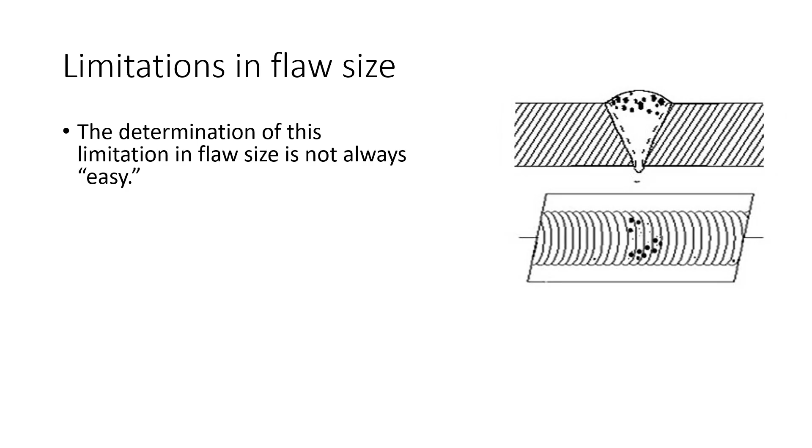What's the limitation in the flaw size that they can find? Determination of the limitation of the flaw size isn't always an easy thing to get figured out. This is something that's got to be figured out and determined, and there's got to be some thought put into it. Once again, this isn't an easy thing to figure out.

One common limitation specified in the use of NDT is no flaws are allowed. And this is just completely insane, because within any material there is going to be a flaw or some kind of discontinuity. It's just getting to the point to where we, as engineers and material science people and inspection technical individuals, can understand what those limitations are. And we need to realize what we can live with and what we can't.

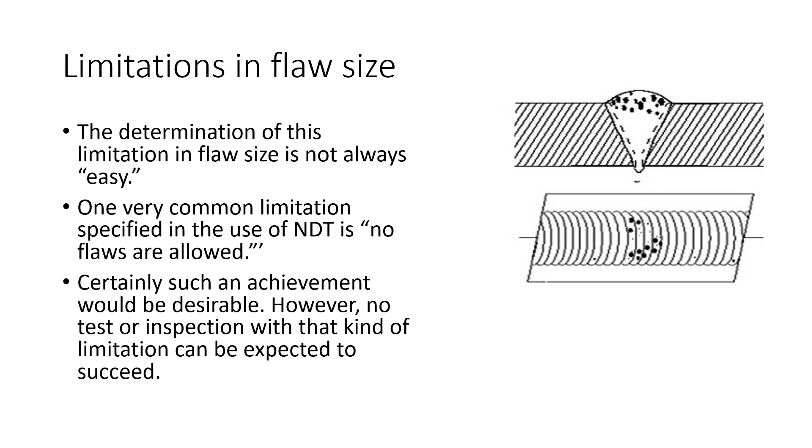So even though we'd like to have no flaws, nothing's perfect in this world. And we need to understand what is the limitations of these processes that we can live with. So no inspection or test method is going to be able to find every last flaw in a piece of material. So with limitations in flaw size, we've got to realize that it's impossible.

There's some things that are impossibilities, like find all flaws or find the smallest flaw possible. Well, what does that mean? And then once we figure that out, we're going to figure out, oh man, this is going to be super expensive. Non-destructive testing is very expensive.

You can make or break a job depending on how much NDE you're going to have to do. So even though we'd like to be able to find the smallest flaw possible, is it really important for everything that we're going to construct or build to just have everything absolutely perfect? Or can we live with certain flaws that are going to be inherent in that structure?

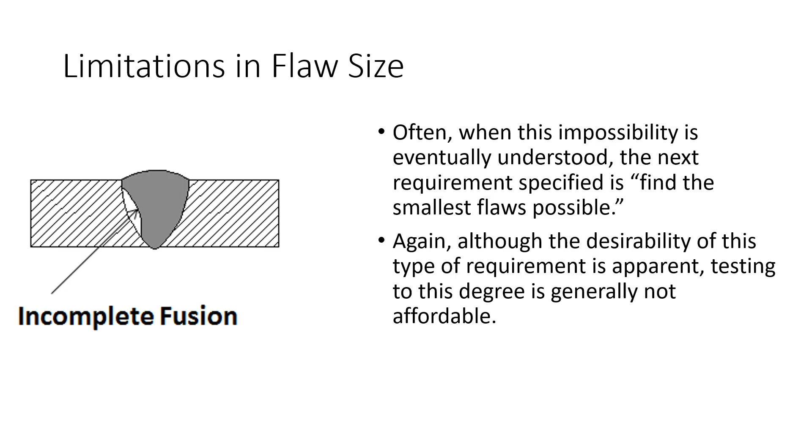So zero defects is usually not super realistic, unless you've just got ungodly sums of money and are in some kind of NASA situation. Because most manufactured materials that we're going to come across are going to have some kind of small imperfections. It's just the way the world works.

And when it boils down to it, a lot of these discontinuities aren't really going to affect our performance once we get something into service. And then, if we're going to go out there and look for really small flaws, the inspection cost is going to go up, because we're looking for needles in a haystack.

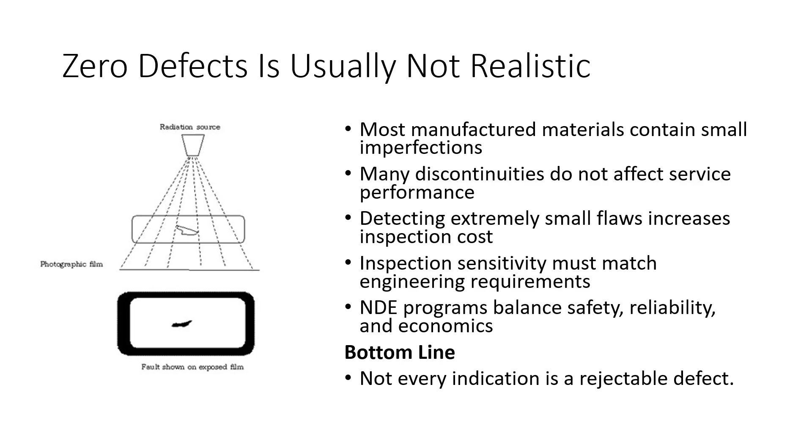So the bottom line is, not every indication that we run across is a rejectable defect. It's a flaw, it's an imperfection, but it's not a rejectable defect. It's not going to do anything in regards to affecting that component to do its job.

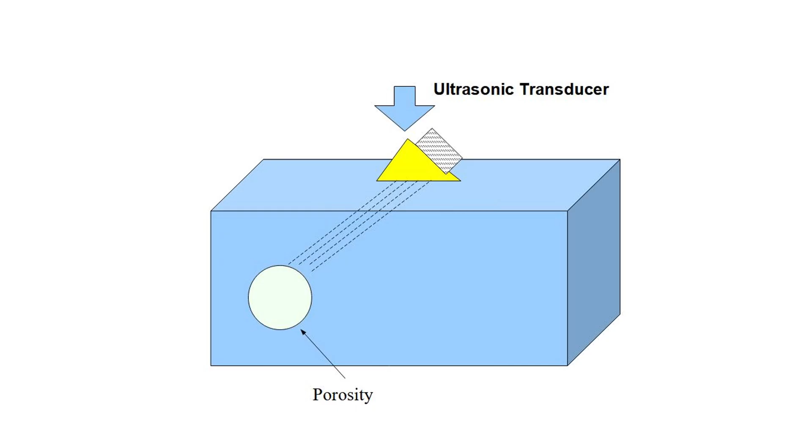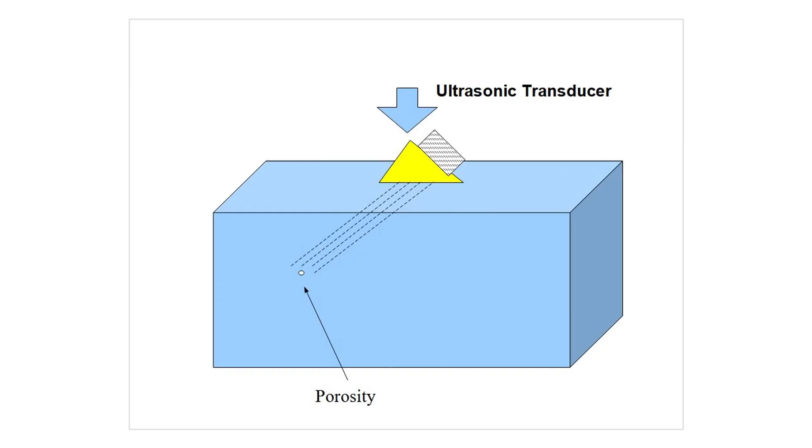Well, does that even count? That's what the non-destructive testing engineers and the structural and design engineers are for. That's their job, to tell us if we can live with this, or maybe we can't even find it. Maybe after a certain size, going smaller and smaller, it might be there, but we might not even be able to find it. So these are some of the things we need to keep in mind when we're talking about critical flaw size.

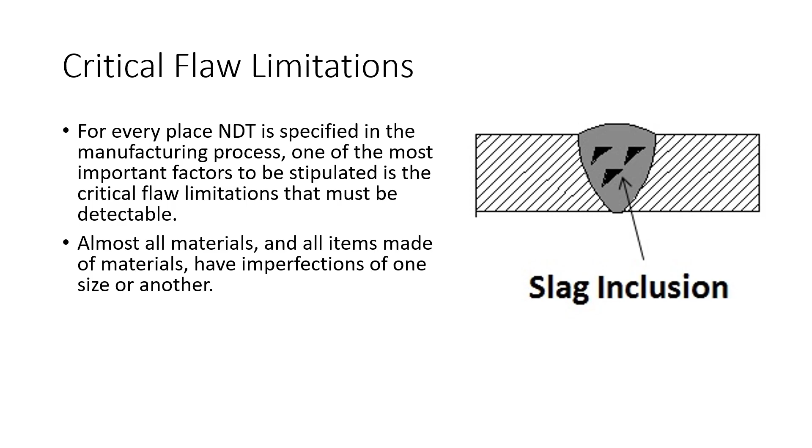So for every place NDT is specified in the manufacturing process, we need to understand that an important factor to stipulate is the critical flaw size limitation. That must be detectable. Can we find this even if we use this process? And almost all materials, as I've stated before, and all items made of any kind of material, have imperfections of one size or another. It's just the way things are working. It's the way our universe is. Something's going to have a flaw. There's very little that is absolutely perfect.

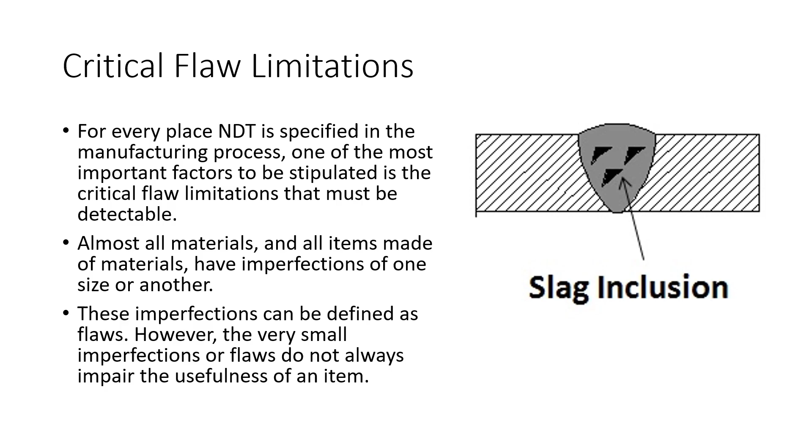So when we have these imperfections, we need to understand: are they a flaw or just an imperfection? A lot of times the very small imperfections or flaws don't necessarily preclude that piece of material from being used or being a useful item. So we need to understand this. We kind of have to get this ingrained in our train of thought when we start getting into NDE, non-destructive examination.

So why does critical flaw size matter? Why do we even care? Well, there are some codes, like structural steel, where you can get away with having porosity up to a certain amount, little bubbles in the metal, in the weld metal. You can have a little bit of porosity. It's not the end of the world. It's probably not going to cause that thing to crash down. Whereas if we get into pipelines, where we're trying to keep things inside the pipe, we really don't want little bubbles or routes that the fluid could use to get out.

So this gets back to: a flaw might be acceptable in one application but could be rejectable in another. Pressure vessels, pipelines, aerospace, they all use different acceptance criteria. A pipeline is not going to have the same acceptance and rejection criteria as something that's going on an airplane or a rocket or whatever.

And the material thickness and loading conditions are going to affect the allowable flaw size. Let's say we've got a big casting, maybe the wall on this casting is 8 inches thick, and we've got a little bit of porosity inside there, or maybe whatever our defect is. Well, that thing's such a beast in our loading conditions, it might not affect it. We can probably get away with some things there that we couldn't get away with on something aerospace that's really thin and light, where we need it to be near perfection.

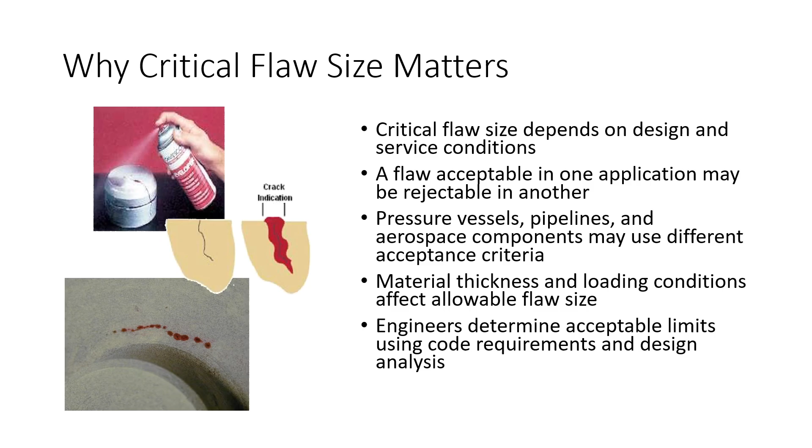So the engineers are going to figure out the acceptance limits, and they're going to do this with code requirements, design analysis, and all that engineer stuff engineers do.

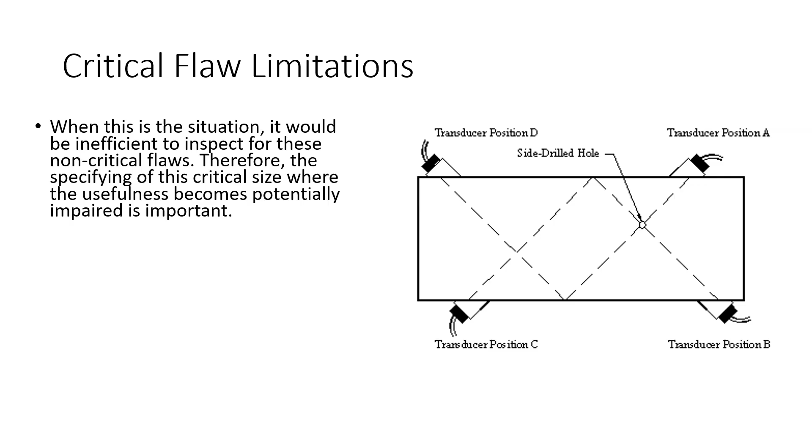So sometimes it's going to be inefficient to inspect for non-critical flaws. Why are we even looking at this if we know there are going to be non-critical flaws in there? Why are we tying up time, man hours, resources, and money? So the design engineers and the non-destructive testing engineers really need to lay this out, and a lot of the codes will do this for you, but they're going to give you a critical flaw size, and lay it out for you, giving guidance on what is a critical flaw, what is that critical flaw size.

So those imperfections or flaws that are critical, or larger than acceptable, are called defects. This is where we go from discontinuity, flaw, imperfection, into defect. It is impossible to determine the flaw limitations required for an inspection without knowing the purpose of the inspection, as well as the complete design requirements of the finished part. So once again, this gets back to the designers and the non-destructive testing engineers giving the person on the floor guidance on what is rejectable and what is something we don't have to worry about.

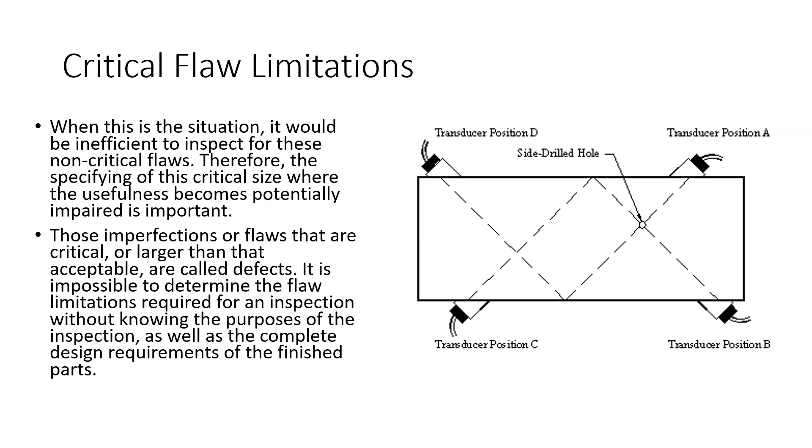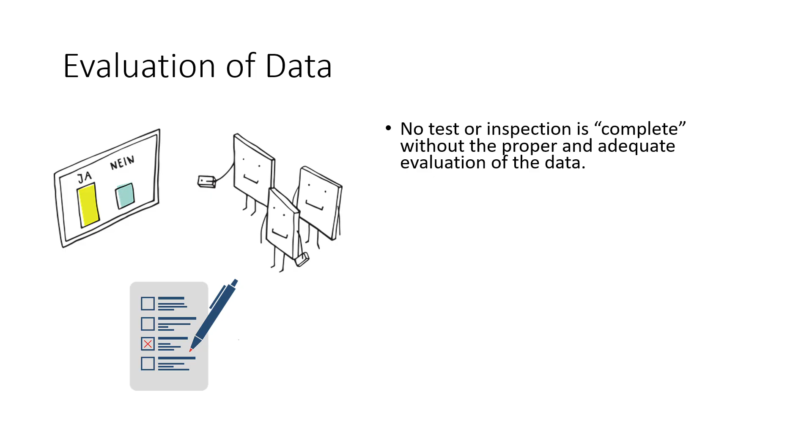So, like anything else in life, if there's no paperwork, it wasn't done, right? So a lot of times we're going to need to provide data, a test record for the testing that we've done. Usually, depending on what type of testing was done, there'll be some kind of evaluation sheet provided by the non-destructive testing personnel that says, hey, we did this test, this is what we found, this is what we didn't find, this is rejectable, this isn't rejectable.

With x-rays, it's a little easier because with an x-ray you've got the x-ray film, and the film will show you - it's like you broke your leg, and the doctor shows you, yeah, you broke your leg right here, we're going to put pins in your leg or whatever. That would be an example of a record.

Not every NDE test method provides results in terms of a permanent record. So sometimes, especially in the modern day, we're going to use like a cell phone or a digital camera to take a picture and then provide the end user with the results of that test.

All right, here's your dye penetrant test. You can see we had a crack right here. This is what you need to remove. Blah blah blah, here's the write up, and here's how we're going to do it. Or maybe it's good - they take a picture, nothing, everything was good, and we've got documented proof of the passing of the test.

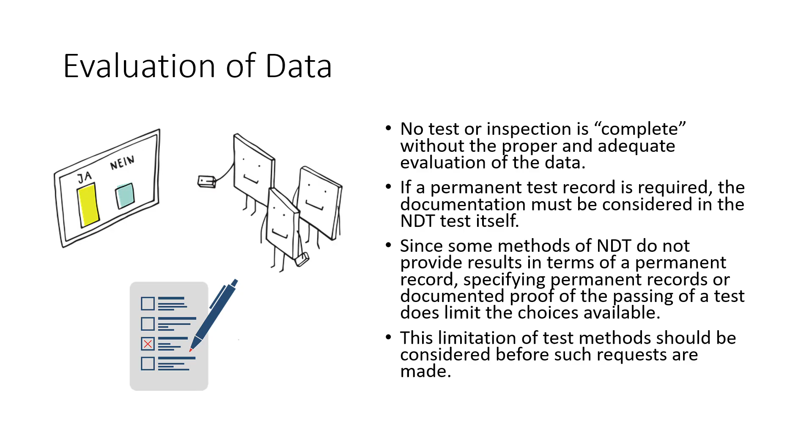So NDE indications - we've got to interpret these things correctly because not every indication is a defect, right? Some indications might be geometric or process related; they're just in there because. And then we can get what are known as false indications during inspection. So we've really got to be able to interpret this stuff.

This comes up in my worldview with ultrasonic testing maybe a little more than others, because you're reading what's going on in there and you have to make an interpretation. So this is why we have things like SNT-TC-1A and inspector training and experience limitations - how little training they can have, what's the minimum amount of training before we turn them loose to start making some of these calls.

A lot of times if we've got evaluation standards, that's going to help with our acceptability. Some examples: rounded porosity indications - what's really going on in there? Maybe we have a linear crack indication, maybe it looks like a linear crack but it's not really. And we've got to interpret that, hey, this is just an indication, it's not really a crack.

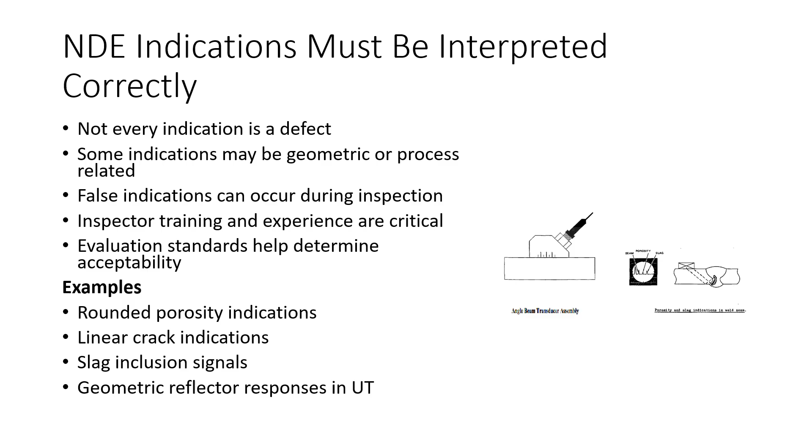So then we get into POD, probability of detection. This tells us how reliable an inspection method is going to be when we start looking for flaws. It's going to be easier to find larger flaws; small flaws we might not be able to find under a certain size. What's going to affect our abilities here? Equipment, our calibration, and our operator skill.

Probability of detection is going to help bolster our ability to evaluate reliability and limitations in regards to what we've got going on. So POD is how we measure the reliability of an inspection method. Can this inspection method find this really tiny flaw? And if it can, what percentage of the time can it find it? Or what is our flaw size that we can find 90% of the time with this process?